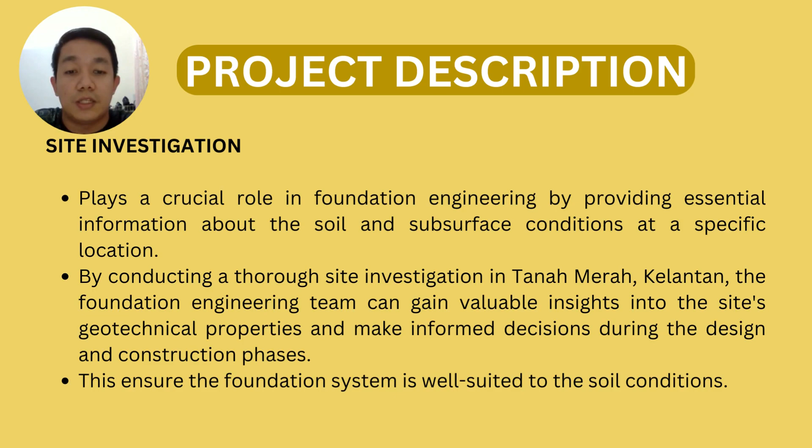The next one is field exploration and testing. The first is standard penetration tests in soils conducted at regular intervals of depth. Samples of disturbed and undisturbed soil, two different kinds, were gathered. Disturbed samples are suitable for testing index properties and identification at varied depths, while undisturbed samples are for strength evaluation.

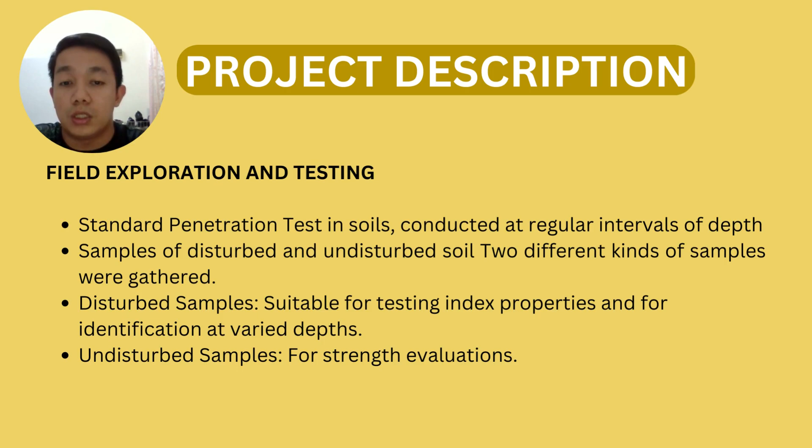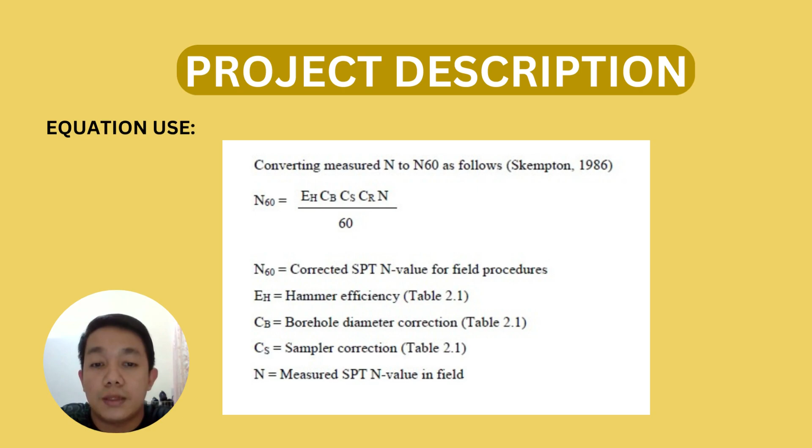This is the equation we use for our project. N60 represents the corrected SPT N value for the field procedure. EH is the hammer efficiency, which can be referred to in table 2.1. CB is the borehole diameter correction, also referred to table 2.1. CS is the sampler correction, also referred to table 2.1. N is the measured SPT N value in the field.

The next one is the correction due to be done irrespective of type of soil. SPT hammer efficiencies, BNBC 2015, table 6.D.4. This is the table for it.

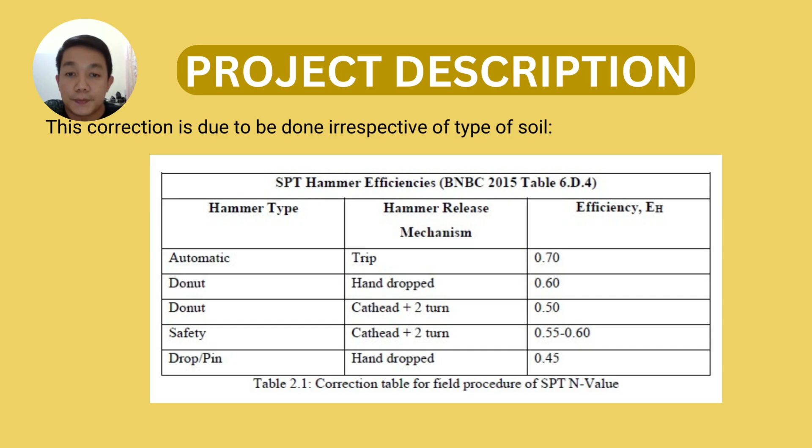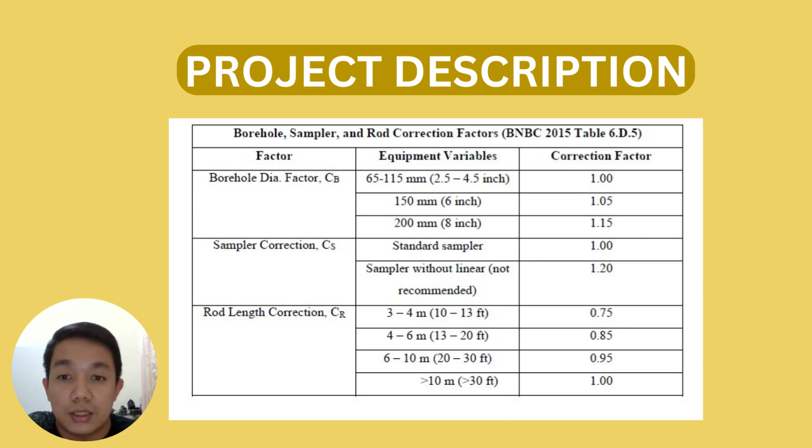As you can see, this is the formula for the angle of friction, where N60 represents the field standard penetration.

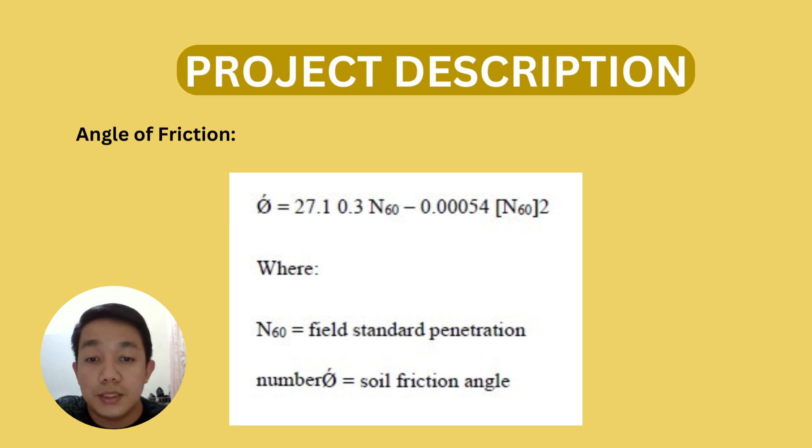Meanwhile, this is the soil profile. The top layer is silty clay, the second is sandy clayey silt, the third is clayey silt, and the last is sandy silt, which represents the most and biggest portion in the soil profile.

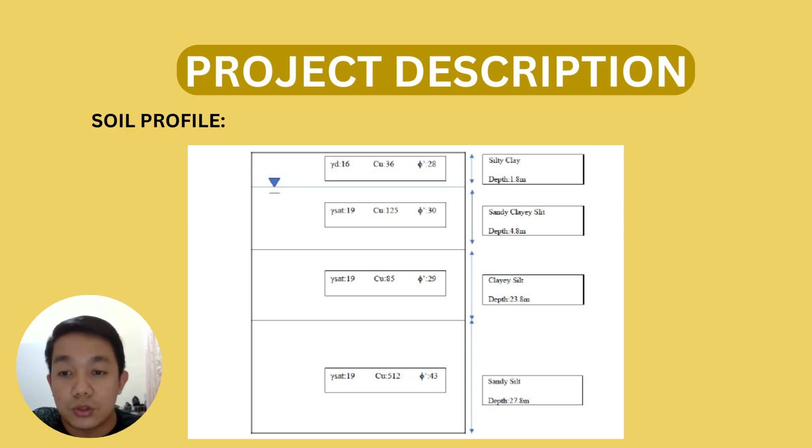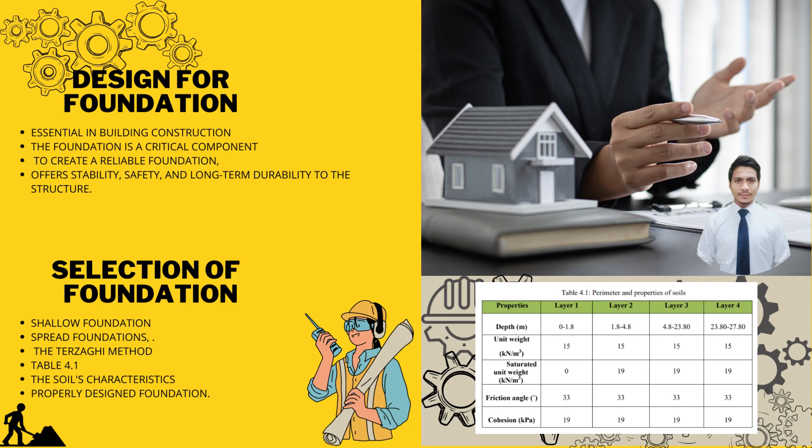For the example of the calculation, I choose Group B, which is 600 kilonewton to 999 kilonewton. The soil properties were given, taken from Table 4.1. The shape of the foundation is square, meaning B size is equal to L size. For the shape equation, the first step is to find FCS, equal to 1 plus B over L multiplied by NQ over NC. Secondly, FQS equals 1 plus B over L multiplied by tangent theta. Then FYS, the equation is 1 minus 0.4 times 1 plus B over L.

After shape, we need to design the depth of the foundation. For the depth equation, dF over B must be less than 1. For theta larger than 0, we need to find FCD, and the equation for FCD is FQD minus 1 minus FQD over NC multiplied by tangent theta. Last but not least, the inclination. The inclination formula is already stated, needed to solve the QU equation, and it is fixed for this selected foundation. The amount of FCI, FQI, and FYI is equal to 1.

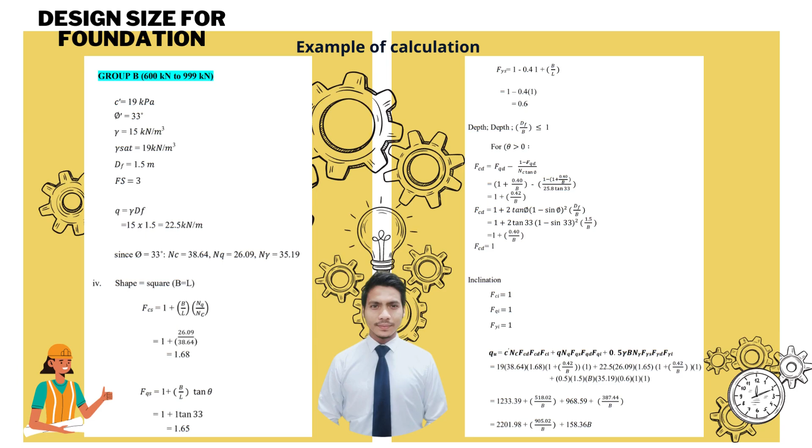After solving the QU equation, the next step is to find QAll, which is bringing back the value of QU and dividing by the safety factor. Then we apply this pressure value to the ground to find the amount of B. Therefore, the size of the spread foundation for Group B is solved.

The result of the calculation size of the foundation for each group is stated in this table: Group A, 100 kilonewton to 599 kilonewton, is 0.8 meters. Group B, 600 kilonewton to 999 kilonewton, is equal to 1.0 meter. Group C, 1000 kilonewton to 1199 kilonewton, B size is also 1.0 meter. Group D, 1200 kilonewton to 1699 kilonewton, is 1.3 meters. And the last one, Group E, 1700 kilonewton to 2400 kilonewton, B size equals 1.6 meters.

Okay, that's all from me. Thank you.

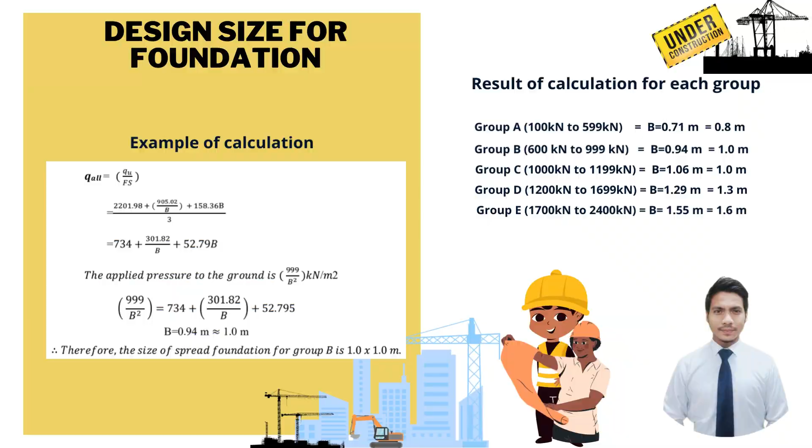Bismillahirrahmanirrahim. My name is Ramsa bin Alam, and I will explain about the checking of settlement of the foundation. Based on the calculation performed, it has been determined that no settlement is expected in Groups A, B, C, and D of the foundation.

However, settlement is predicted to occur in Group E, and the calculated settlement value exceeds the allowable limit. Considering this finding, it is essential to implement measures to prevent settlement in Group E and ensure the stability and longevity of the structure.

Foundation improvement techniques can be employed to address this issue. This may include soil stabilization methods such as compaction or reinforcement, or the use of specialized foundation systems such as deep foundation or ground improvement techniques. By implementing appropriate foundation improvement measures, we can mitigate the settlement issue in Group E and ensure the foundation capacity to support the building without compromising its structural integrity or causing any undesirable consequences in the future.

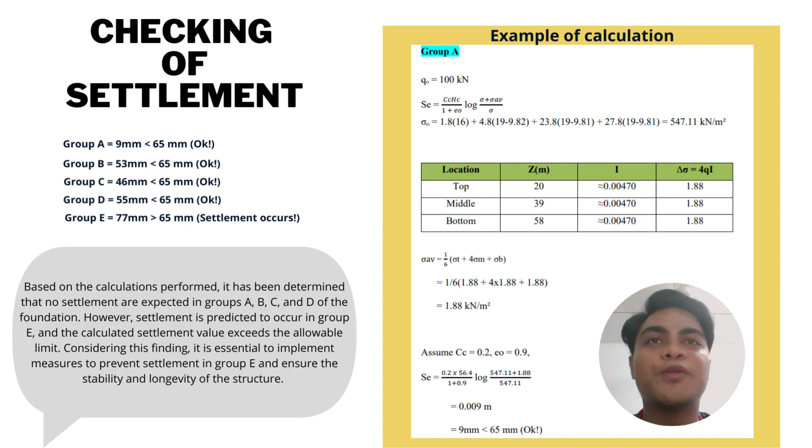First, our group suggests spread footing as our foundation design. The soil parameters were obtained from the bore log, and the soil for this project is clay soil. The loading from column transferred to foundation are 100 kN, 600 kN, 1000 kN, and 1700 kN. The proposed sizes are 0.8 meter by 0.8 meter, 1 meter by 1 meter, 1.1 meter by 1.1 meter, 1.3 meter by 1.3 meter, and the last is 1.6 meter by 1.6 meter.

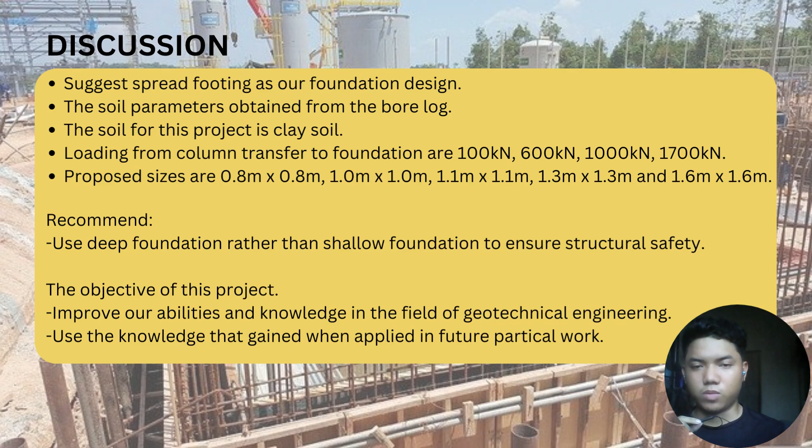Our group also recommends using deep foundation rather than shallow foundation to ensure structural safety. Even though deep foundation is more expensive than shallow foundation, our group suggests using deep foundation rather than shallow foundation. The objective for this project is to improve our abilities and knowledge in the field of geotechnical engineering, and also to use the knowledge gained when applied in future practical work.

Next, I will present about the appendix for this project. There are two types of appendix for this project. First is Appendix A, showing the SI report of bore log analysis for this project, and Appendix B shows the plan of the building for this project, and also the design of foundation for this project based on the calculation that our group did.

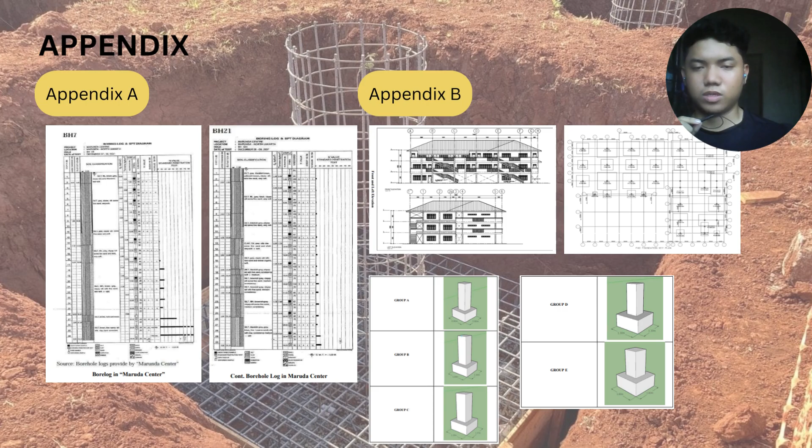So that's all for me. Thank you. So that's all from our group explanation about the calculation and also the design of foundation for this project. So that's all from me and our group. Thank you.